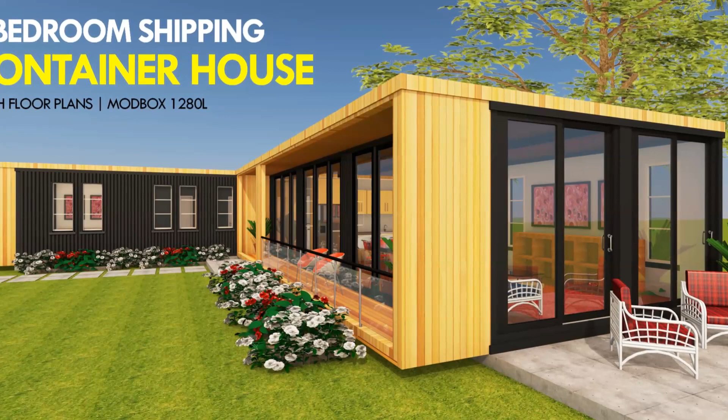This video brings to you a 1,280 square feet 3-bedroom shipping container house design. Stay tuned as we take a tour through the house.

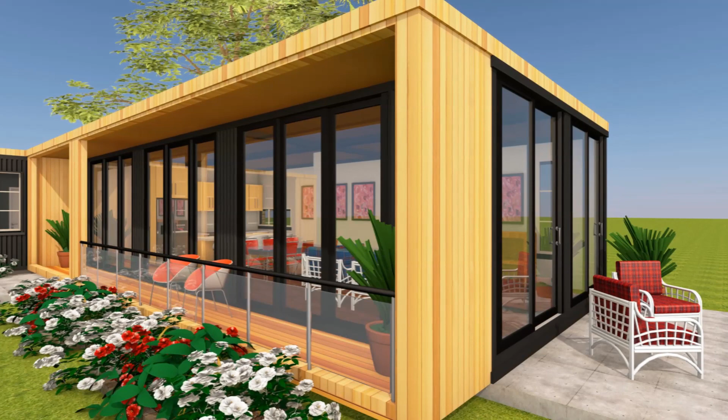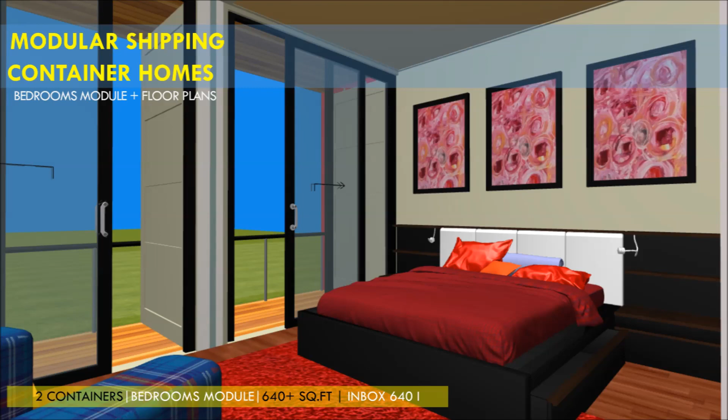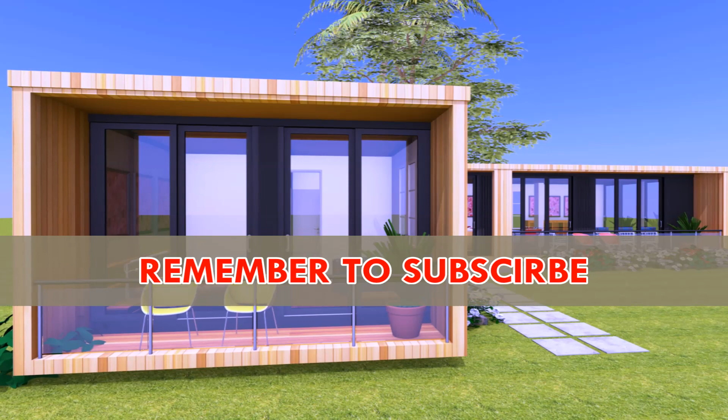In our past episodes, we covered in detail the MODBOX 1280L, a living module made from 2 shipping containers, and the MODBOX 640B, a bedrooms module made from 2 40-foot shipping containers. This video brings to you a modern shipping container modular home design formed by combining the living module and the bedrooms module to create an elegant 3-bedroom shipping container house with an L-shaped floor plan from 4 shipping containers.

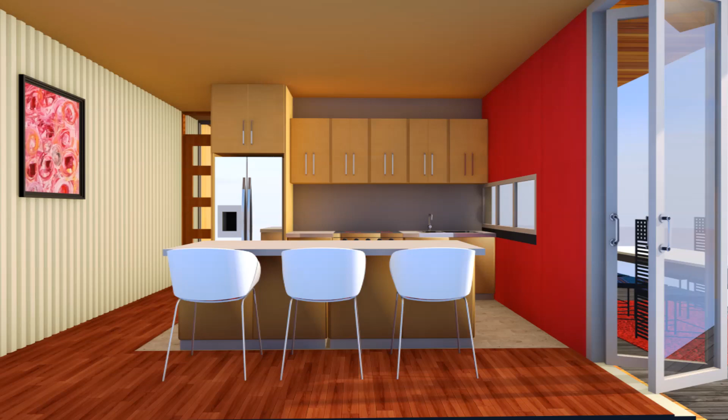This video will highlight the design brief of the bedrooms and the living module, 3D floor plans of the entire house, full color pictures of the exterior and interior design with finishes options, plus a cost estimate checklist to guide you in your own container house project.

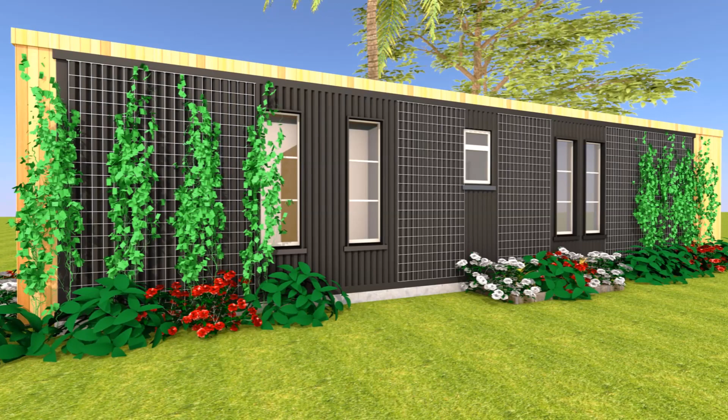We look at the foundation design. Before the container modules are delivered on site, it is advisable to have an appropriate foundation to accommodate your new container modules. Use a raised foundation to elevate the containers away from moisture. The elevated position of the container will provide a height necessary to accommodate any outdoor seating for your living and bedroom spaces. In this house design, we've used a raft foundation to hold our container modules.

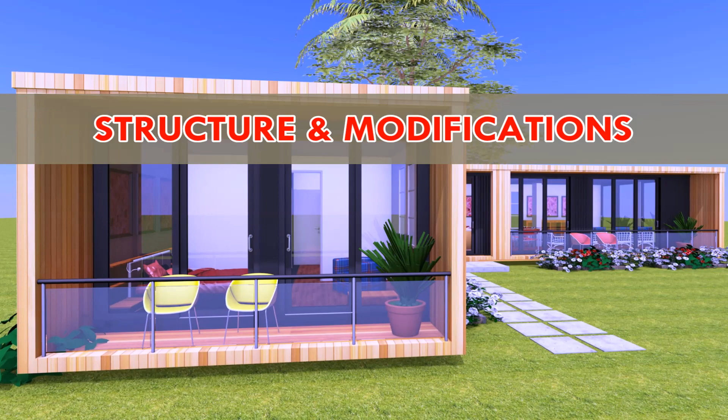The next thing we look at is the structure and modification. This modular design uses 4 40-foot shipping containers to create a 1,280 plus square feet MODBOX 1280L 3-bedroom house. This design accommodates the following features.

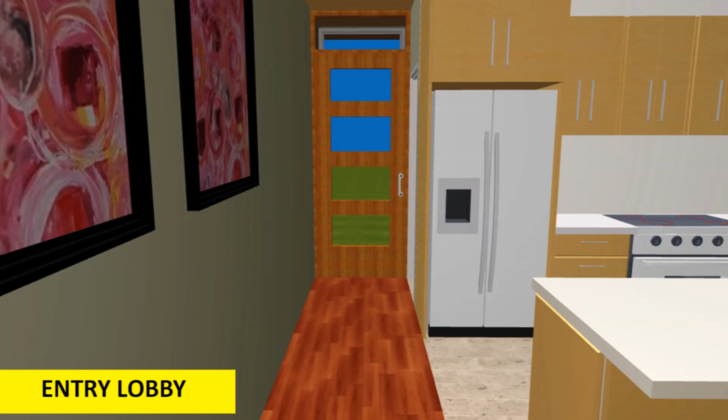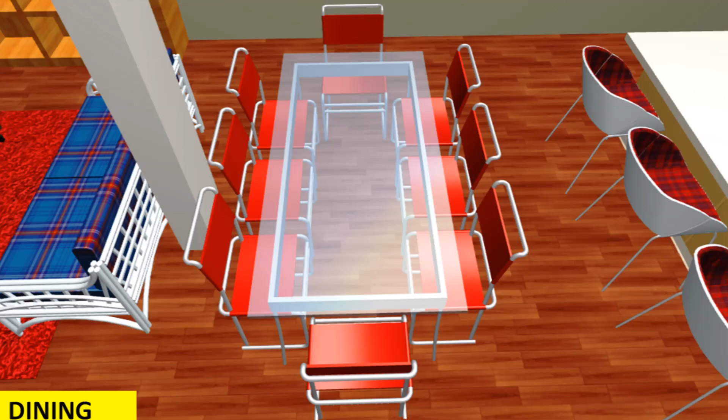From the entrance lobby, on your right is an open plan living module encompassing a laundry room, an open plan kitchen with an island to accommodate a breakfast table for 3, a dining table for 6 or a maximum of 8, and a spacious lounge opening to an outdoor family terrace accessed through full height sliding doors.

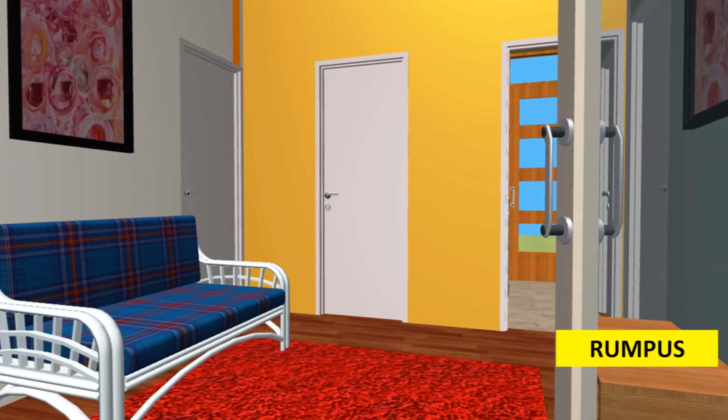From the entrance lobby on your left, you can access the bedrooms module, which is connected to the living module through the rumpus room. This rumpus room can double up as a TV room or a children's playroom. From here, you can access the 2 other bedrooms on the right-hand side or go to the master bedroom ensuite with a walk-in closet on the right-hand side.

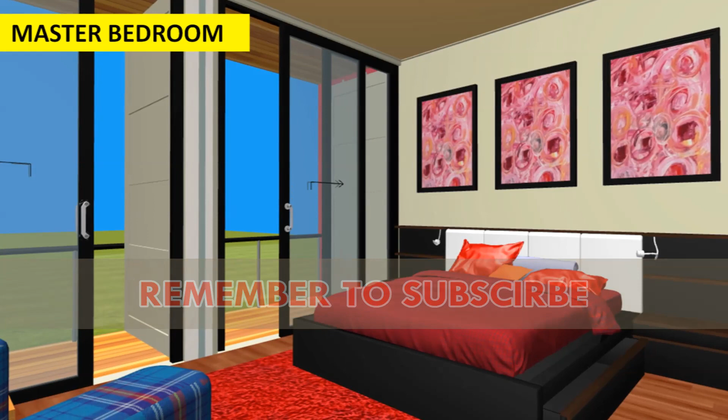Each module is designed with a laundry unit, and in the bedrooms module, the laundry unit has been converted into a small study room. The 2 bedrooms share a common bathroom in between the study and the master bathroom.

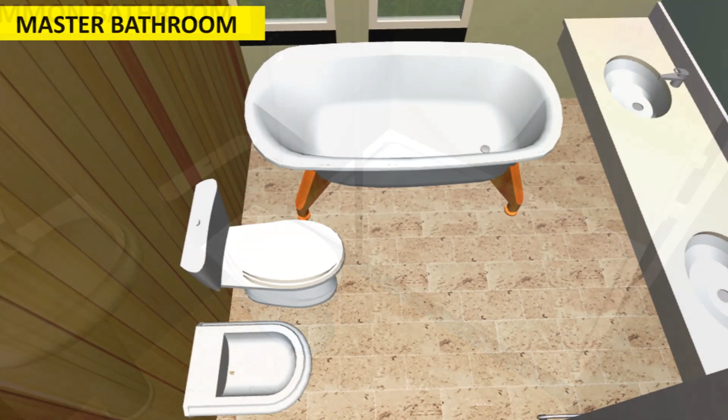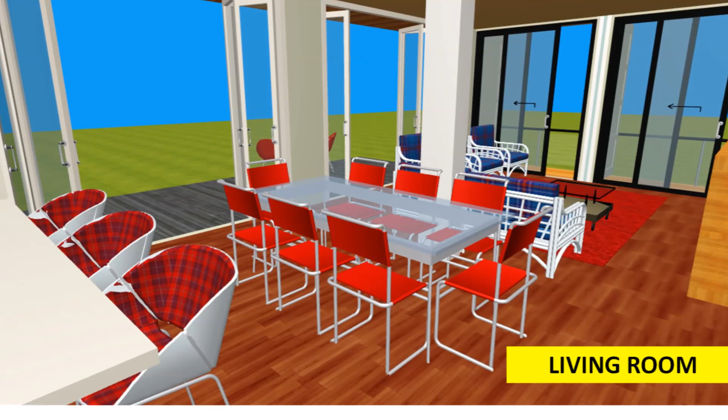This design series uses standardized optimal sized windows and doors which do not require any specialized modification to the walls of the shipping containers, save for the full height 3-meter wide door openings to the family terrace and all the outdoor seating spaces. Adequate fenestration for daylighting helps to kill the claustrophobic feel of living in a shipping container.

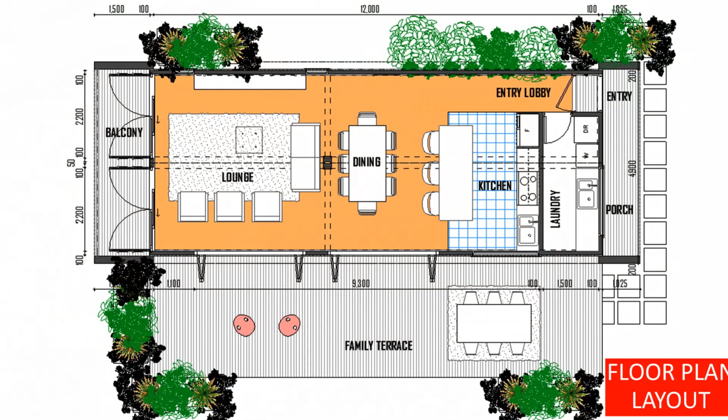Because of the wide openings and the open plan living design of the living space, people have been asking me, how do you structurally accommodate all these cutouts? And the answer is simple. A structural steel column and beam has been introduced between the lounge and the dining. In addition, we have additional structural reinforcement on the kitchen cum laundry partition. All these have been done to structurally improve the performance of these modules when placed on site.

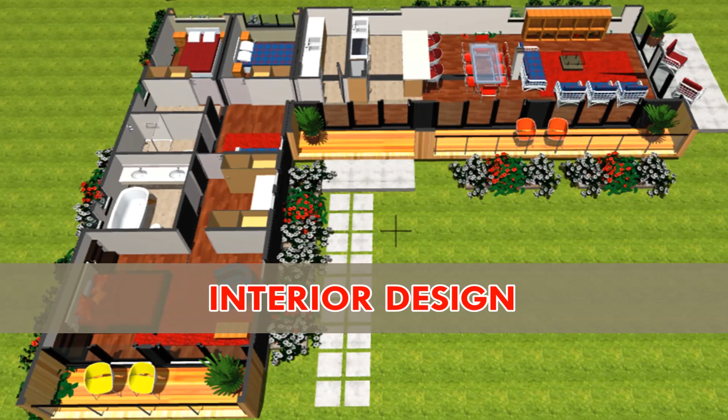On the interior design, we've adopted a minimalist interior when furnishing our shipping container house. You are encouraged to use space-saving furniture ideas like Murphy beds in the bedroom so that you can allow multifunctional use of the space without littering it with too much furniture.

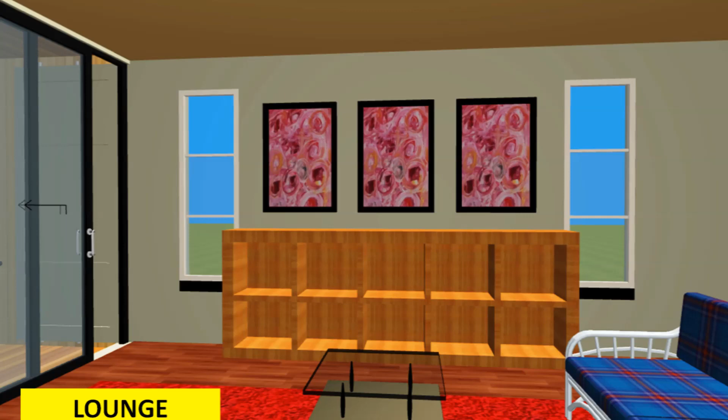Use flat pack cabinets for the wardrobes and also for the kitchen, since these custom units are versatile and come in a range of colors and sizes to choose from. Flat packs will also help you save on time and money.

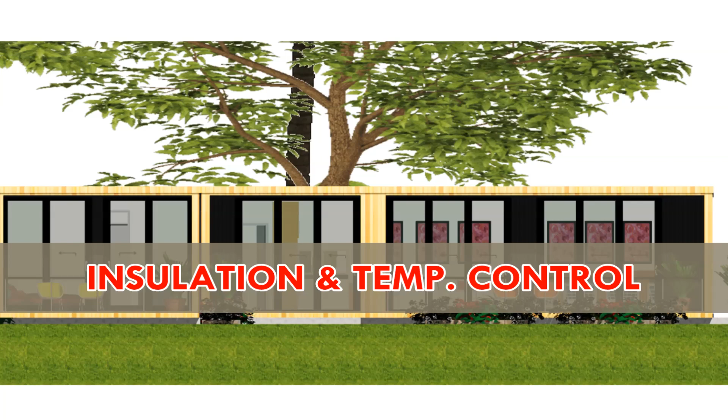Insulation and temperature control. The interior of a living space in these particular modules is lined with an appropriate insulation material depending on the climate of where you want to build them. Insulation is essential because it prevents condensation, which can corrode the containers and also cause mold formation. To achieve the best results in a cold climate location, use closed cell spray foam insulation.

In tropical climates, keeping heat away from your house is the biggest challenge. Insulation blanket with plasterboard lining will do just fine. To finish off the interior, the walls are lined with plasterboard and given a light colored paint to make the interior space look brighter and bigger.

You are encouraged to use a damp-proof course underlay to cover the existing container plywood floor, then finish it with laminated timber flooring and an appropriate tile finish for all the wet areas. You are encouraged to use similar materials to finish all the wet areas of the house in order to create a harmonious interior.

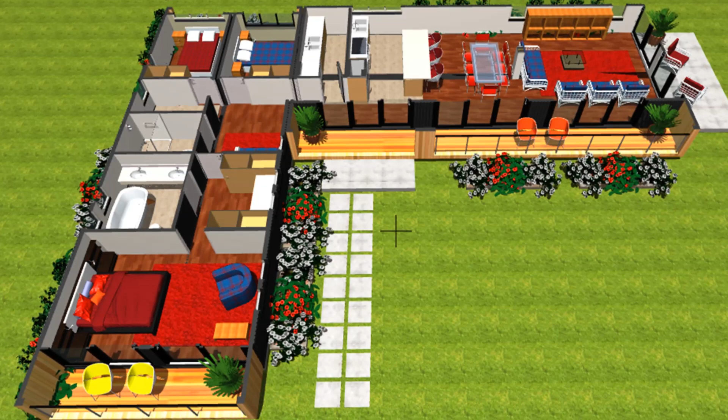Outdoors and exterior design. A deck is a quick and easy way to add extra living space to the rather limited space inside a shipping container. With the limited width of 2.4 meters, this design has managed to accommodate sufficient outdoor space to complement the rather constricting dimensions of shipping containers.

This design comes with a 1.2 meter wide wooden canopy and deck spanning the entire frontage of the living module and the container end openings for the master bedroom on the bedrooms module. An additional patio space from the living room, accessed through the full height sliding door, has also been provided to complement the living function.

The original cargo doors on all the containers have been removed and replaced with full height sliding doors to enhance access and daylighting. To cover the large bare walls on the container, a mesh wire is welded onto the exterior to accommodate vines and climbers, introducing a bit of greenery.

If you are using a one-trip container, consider leaving the exterior as is, with its original color and markings, to preserve its charm and history. This is also the best way to save on the cost of painting the exterior.

This design comes with additional timber modules to form the entrance porch to the living module, a Juliet balcony enclosure to the master bedroom, and a timber fascia board to the entire house concealing the roof. Other exterior cladding options can also be explored.

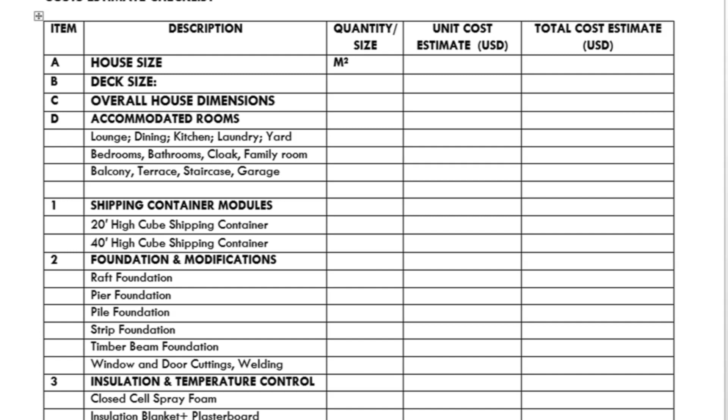The MODBOX 1280L Home Series comes with a cost estimate checklist. This is an itemized checklist to guide you on the things to consider when planning for your own shipping container project. These inclusions vary depending on what you find necessary and appropriate for your design.

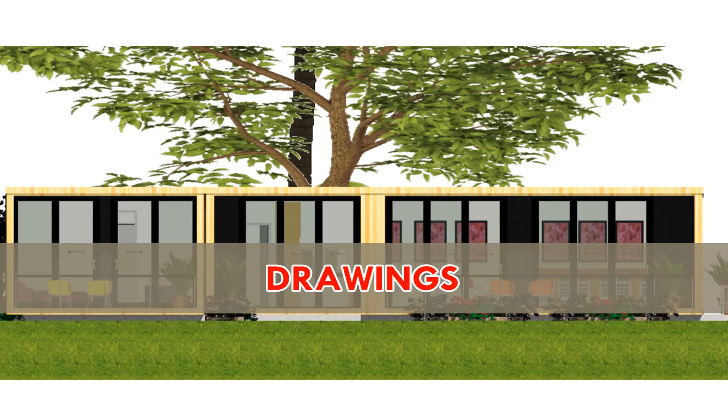If you like this design and want to make an extension to your existing house, or build your new 3-bedroom house, feel free to visit our website and purchase the blueprints, then give them to your builder or fabricate it yourself as a DIY project. The standard set of drawings comes in DWG and PDF formats to suit your preference.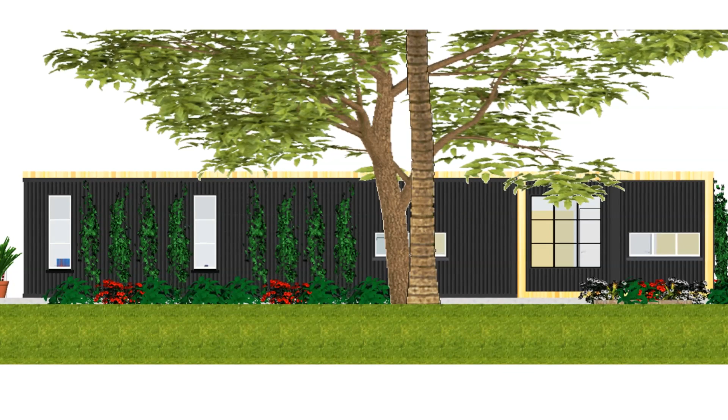The set of drawings have dimensioned floor plans. We have elevations, a roof plan, foundation plan, and all the details. For any revisions, design inquiries, and custom design, contact us on our website sheltermod.com.